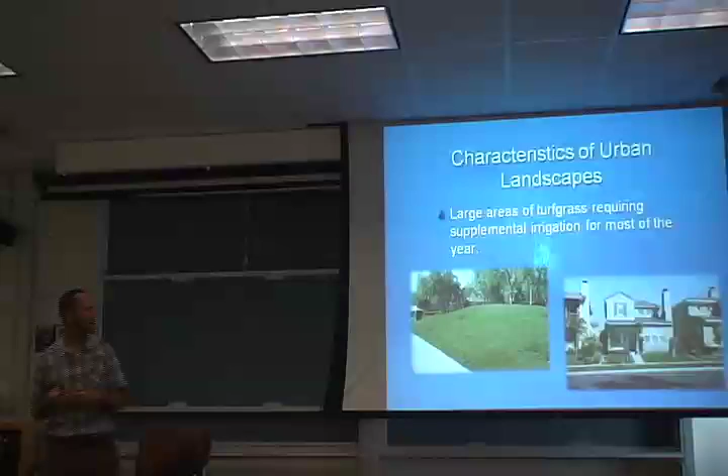Here's something you see quite often, maybe not as common up here as in Southern California. Speaking as someone who's not a landscape architect, there's a belief that when you go to a shopping center or urban area, they tend to cover things so you don't see the tops of the cars. Your eye kind of goes up, and they do that a lot with big sloping turf grass areas.

Here's an example out in front of a homeowners association. The entrance is here, and they're covering that wrought iron gate that's maybe not that attractive, which you don't really see until you get up closer. So from the road, you're just going by and you see green turf.

The problem is you have these large areas of turf grass, sloped pretty significantly. It's actually kind of entertaining watching people mow and maintain these things, pushing a lawnmower up or running after it as it goes down into the street. Then there's a sidewalk put in place, and then the street right here.

So when you apply fertilizers or irrigation water, anything applied on top, like pesticides or fertilizers, runs very quickly off this soil profile onto the sidewalk and out to the street, into the storm drains, and then we have negative impacts on our local creeks and streams. So turf grass is a big common thing.

Most people, especially when they move into a new home, have maybe 60 days, sometimes 6 months, to put in their landscape, and they need to do something quick. So most people call the sod farm and say, just deliver a big pallet of sod, and I'll put turf grass in front. Or a developer may do that for them. For the most part, it's going to look something like this.

It's not a big landscape in front of the house. This is very common, obviously there are exceptions, you can have larger estates, but for the most part this is what our landscape is becoming dotted with.

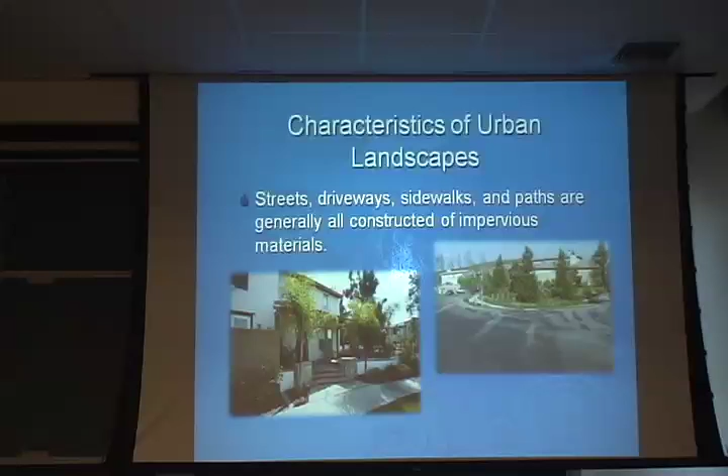So the developer put in what they were supposed to do. They put in a swale, but then they lost track and said, okay, we need to make it look good, so we're going to put in the most common turf grass, which is tall fescue, marathon. They put that in, and now they're maintaining it like it was a typical turf grass area. So it's losing its ability to do what it was originally planned to do, which was catch runoff and filter pollutants. Now it's kind of contributing to the problem. They're fertilizing it, mowing it, and having to irrigate it. It doesn't really solve the problem we're talking about.

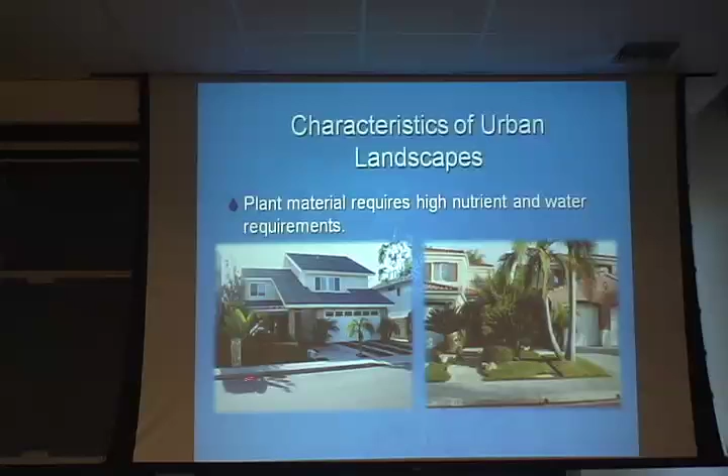Most of our plant materials are those that require a lot of nutrients to maintain their green color, as well as usually a lot of water, although we're finding there are some plants out there that we think use a lot of water, but maybe don't necessarily need as much as we're giving them. But for the most part, that's the belief most people have: regular water, regular fertilizer, especially for turf grass. So here's our typical landscapes in Southern California.

So anytime you do any applications of chemicals, especially fertilizer, people don't cover those drains, they don't even think about it. They just basically go right over the top of it. So you're basically putting pollutants directly into your storm drain system that way.

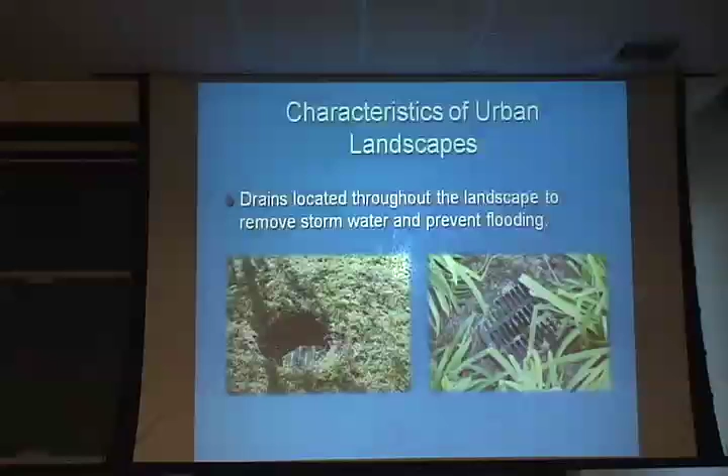And in older homes, people kind of lose track of these drains. You could be out gardening or doing some other activity in the yard, digging, and all of a sudden you'll hit something and think, I didn't even know there was a drainage pipe there, or some kind of other drainage system. So that's an issue.

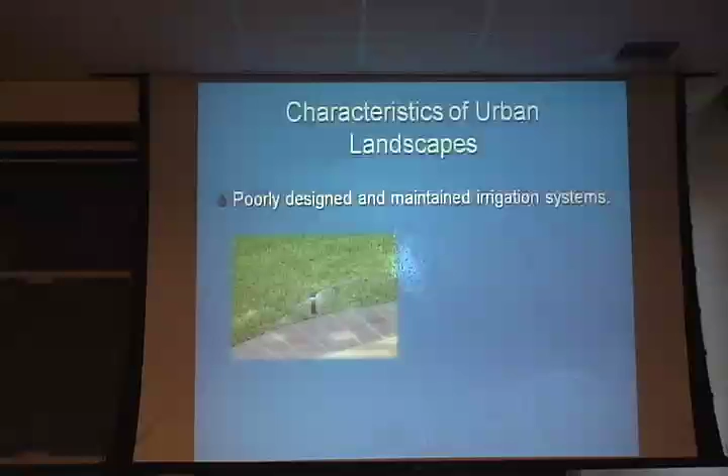This is probably the number one issue, and it's one of the reasons why we hand out those sprinkler keys you got earlier—that's just one way we get information out to the public to let them know one of the biggest issues we deal with is poor irrigation: poor design, poor maintenance, and poor scheduling. People just like to turn on the water, and as long as everything's green and looks good, they think things must be irrigated properly.

And that is true in that case, but we've got plenty of runoff issues during the rain, or sprinklers turned the wrong direction and not even watering the landscape—they're watering the hardscape instead.

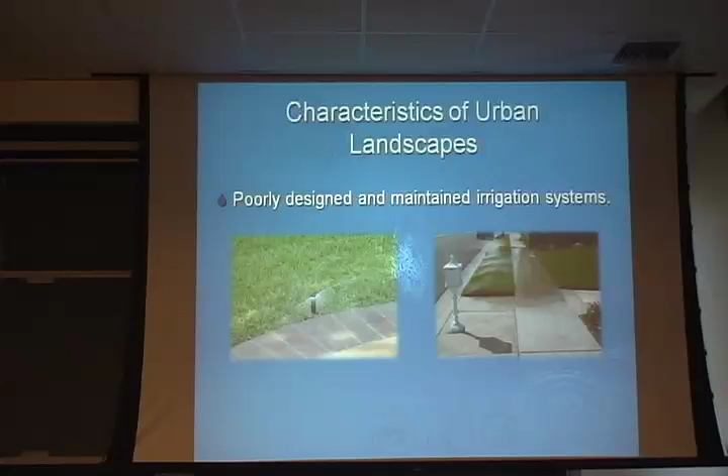Pressure too high in your system causes a misting effect, which leads to runoff very quickly, and you also don't get good distribution uniformity onto the plant material you're trying to irrigate. This is a common issue where people install a new irrigation system without checking the incoming pressure, and end up with sprinklers misting like you're at a restaurant in Palm Springs.

The other issue we often don't think about, generally an ag issue, is the movement of sediment. The thinking is that once you urbanize, pave over everything, and put in landscapes, you won't have much sediment movement. I'll show you how we found that not to be the case—this is an example of a landscape with a broken sprinkler that hasn't been fixed for some time, so it's picking up sediment and mulch and moving it across the hardscape system.

It's hard to tell, but this is sloped right out to the street into a gutter system, and so again, it's a way to carry pollutants.

One of the biggest pollutants we see on sediment are all the new pesticides that are out there. They adsorb to organic matter very well, and the idea is that they adsorb well so they stay on site. That's true as long as this doesn't happen. What we're finding is this happens more often than not, and we're ending up with pesticides in the streams and creeks again.

Often you'll see broken sprinklers - that's just poor maintenance. That's very common with homeowners as well as commercial, but even more so with homeowners. Most people, if they don't see any brown spots, and their irrigation comes on at 4 or 5 o'clock in the morning, they're not interested.

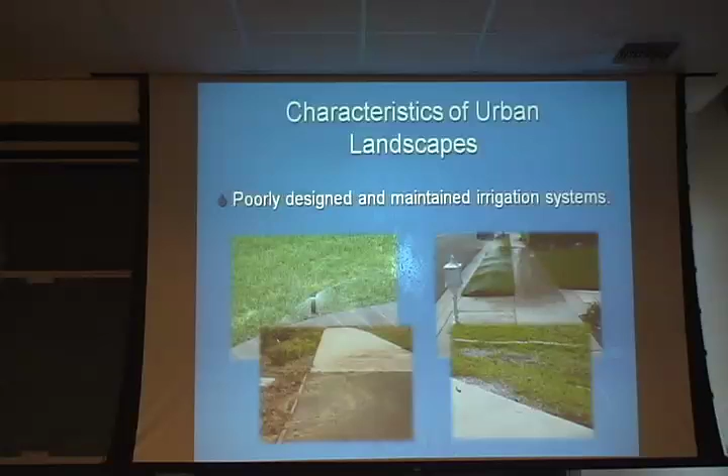Then there's these kind of designs, and these are becoming more popular again. They were popular a long time ago, then disappeared, and now we're seeing them pop up in some of the new developments. This is down in Corona del Mar, about 2 blocks from the beach. This is a little bit further up, but what's difficult about this? It looks good.

How do you irrigate that? Unless you've designed some sub-irrigation way that you can irrigate it without runoff, you're going to have several sprinklers throughout, and you're going to end up watering a lot of hardscape. And you're going to have a lot of runoff - it's just going to happen. Often that's not thought about. This turfgrass is a high water user - you put a real fine strip of turfgrass and surround it with hardscape that gets real hot, you're going to have to irrigate that a lot.

Question: What type of grass or ground cover would you suggest using instead? Because I know that's a really nice, popular design now. It is a popular design, and to be honest, my suggestion is it's just not a good way to go. Plant material in a situation like that is almost impossible to irrigate properly.

And then also you have other issues that I see. Usually it looks good for a while, but then once it's been driven on and you park cars near it, it's hard for homeowners. I get a lot of calls from homeowners - I've got this design and I've got brown spots or yellow spots, and it's like, well, you're parking your car there, you get all the fluids coming out. It just doesn't look good.

So if it's going to be an area where it doesn't get high traffic, you might be able to get away with it and use some kind of stuff. What about like a patio or something? You might be able to get away with it in that situation, especially if it was drought tolerant or some sort of succulent. Yeah, so you could use succulents, thymes, those kind of things - those would probably work better in that kind of situation.

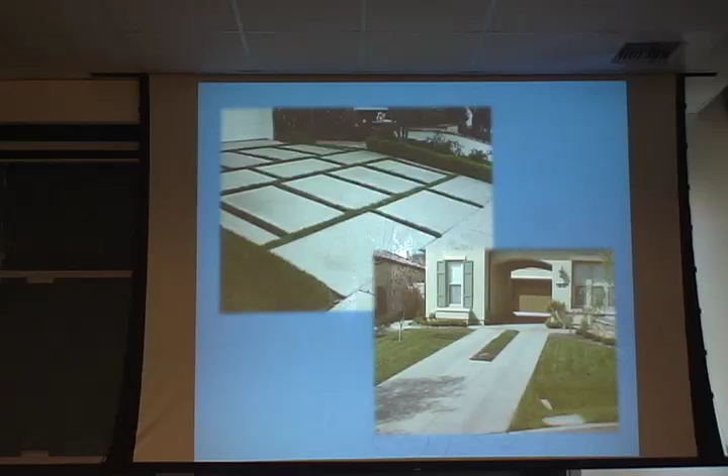You could have the design up there, and then you need to make sure you've done some other mitigation to take care of it. Here's a picture of that little bit of a swale. You can see the turfgrass going right down into the swale. It doesn't become a real effective swale though, because if you're fertilizing and watering it, it's basically just part of your lawn.

So here's an example of that curb core. This photo was taken out in the Corona Temecula area in Southern California. You can kind of see the green cast in the gutter here, which means you're growing algae. What does algae need to grow? It needs nitrogen, but it also needs water there all the time. That means there's water in these gutters all the time, it doesn't dry out. Whether that's from irrigation, car washing, or any of the other activities you do in and around your home, this is just a constant thing you see, and that's why we have that term urban drool. It's just a constant thing that's going on.

The project that Loren and I are working on - I think he talked a little bit about it at the first class - is looking a lot at just how much urban drool is going on. We see it all the time. We can go out any time of day to any of our sites, and there's always some water to catch.

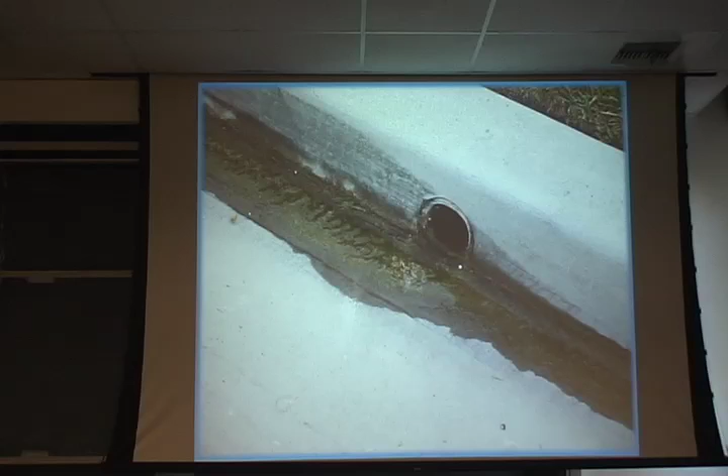Now, you'd think that wouldn't be, because everybody's always grown up with these signs - I know I have - no dumping, drains to ocean, or they talk about whatever rivers are close by to wherever you live. Don't dump, and this includes going right into the storm drain. This has been somewhat effective, but I think there's still, when you go out and talk to people, they understand that yes, it drains to the ocean, but they often think of dumping. Like it says dumping, so they think of the person dumping a can of oil or washing their paint can out in front of their house. They're not really thinking about the day-to-day activities around their home or what's going on in their landscape that also contributes to this, because that adds up over time.

And that's what we found in our research, that if this is going on 24 hours a day, 7 days a week, maybe it's a very tiny amount of nitrogen or pesticide. But if you add up all those days over the entire year period, you're going to end up with a large, large load of whatever it is - nitrogen or a certain type of pesticide. So people don't really have that connection yet. They still don't quite understand that every activity they do around their home could have an impact downstream.

So obviously these things go into these storm drains, and for the most part, in Northern and Southern California, once it gets out of your developed area, it goes into some kind of natural stream. There's very few cases, maybe in Los Angeles and some of the older developed areas, where they go into nice big concrete flood control channels. They've gotten rid of all the natural vegetation, so it's a little different system, and it goes right out to the ocean. But most of the newer developments, it's basically into a stream or a creek that's not used for flood control in that sense.

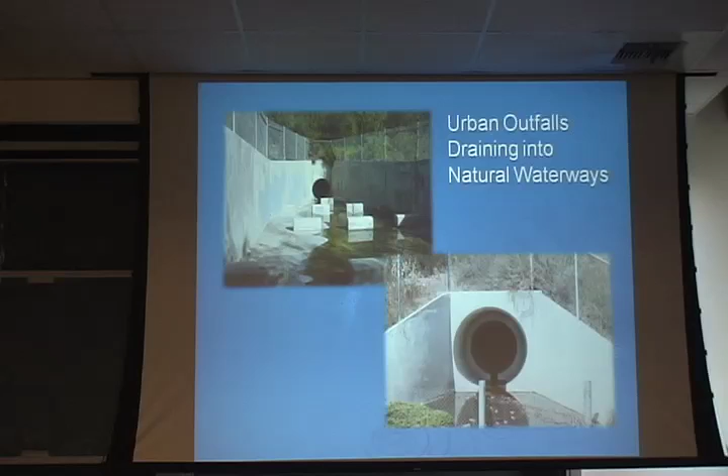So you get all those pollutants, trash and sediment, all those things. In dry weather, they end up on this apron, and then once you have a big storm, it pushes that out into the creek further on or into the ocean. In Southern California, we're always having beach closures because of that - right before or after a storm is when they have the beach closures. But a lot of that stuff's being loaded up into the system all the rest of the year, and then when we get that first big storm, it gets pushed in and closes the beach. So you end up with all kinds of detrimental effects.

So you've got algae blooms. This is a picture of the Newport Back Bay, and there's all kinds of floating algae mats. For the most part, one of the things we also have a hard time with is convincing people that yes, what you do around your home has a negative impact downstream - but should you care about that negative impact? Some people don't have a connection with the environment downstream. Maybe you can't always use, well, do you go to the beach and go swimming? Some people never go to the beach, especially in certain areas of Southern California further inland. It's just not something they do on a regular basis.

They're not surfers or whatever, so you've got to find what kind of beneficial use they think they have for water - that could be simply that it's used for drinking water, or some other recreational activity like fishing or all the things you've heard about. People usually have some connection in that sense.

Okay, so this is just kind of a summary of the things that our current urban landscapes result in as far as water quality. So we said increase in impervious surface - that's a 50 to 70% increase in surface runoff when you do that urbanization.

The rainfall is not detained. In those first couple slides I showed you, when you have a rainfall event, most of that water is going to end up percolating into the ground. That's not going to be true in an urban area, because that's not what we want it to do. We want it to move away very quickly from all of our structures and then funnel it off to a lake or a stream or creek or the ocean.

The other thing is that we disturb and compact and pave over all the soils. So even if you have a good soil system there, when the development is put in, it's basically removed. You're going into a sometimes very sterile environment that doesn't have the capacity to filter nutrients and break down pesticides. So you end up with poor infiltration and percolation, and then when you have a rain event or try to irrigate, you have runoff very quickly and easily.

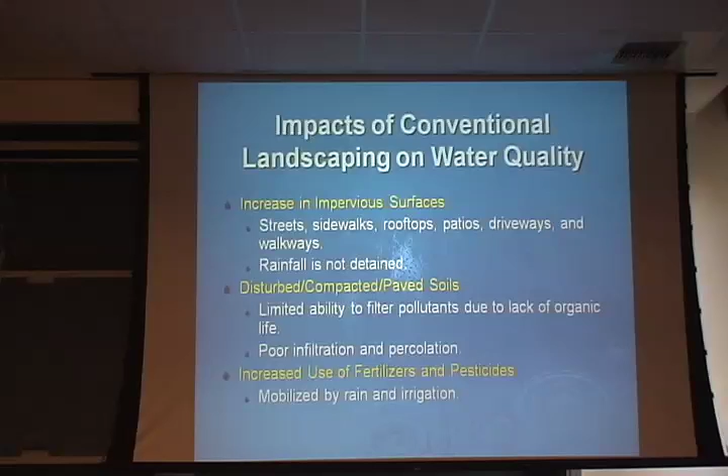Lastly, you see really an increased use of fertilizers and pesticides to maintain the aesthetic value of those landscapes. People want things to look a certain way. Obviously some homeowners have more tolerance than others, and it really depends on the situation, but for the most part we are using more fertilizers and more pesticides in that situation.

So what I want to do now is go through a demonstration, outreach, and also research project that we put together at the South Coast Research and Extension Center in Irvine to look at some of these things. About 5 to 6 years ago, we had a lot of pressure, a lot of people asking questions from a stormwater viewpoint - working for the counties, working for the cities, working for professional landscape contractors.

They're all coming to us saying, we don't really know what to do. What kind of things should we start implementing? What works? What doesn't work? What isn't extremely costly? Because there's a lot of nice things you can do if you've got a lot of money to spend.

And it's getting even worse now. I mean, people aren't willing to come in and just rip out a landscape and put in all these great features that mitigate pollution, okay?

So developers also came to us and said, what works, what doesn't? We've got all kinds of companies coming to us saying that they have the magic bullet, this will solve every problem that we have. What do we do? So we came up with this idea of putting together a few landscapes that took some of these ideas that weren't real expensive, and we tried to plug them into a residential landscape and see how well they work.

The designs were - we had one typical landscape, so we wanted a control, which was our conventional landscape. It was very simple, very similar to those pictures I showed you at the beginning where there's turfgrass in the front. Basically I call this my Home Depot Lowe's yard - all the plant material is stuff you could walk into one of those big box stores and find really easy. The irrigation system is similar, and all the features are basically conventional or traditional.

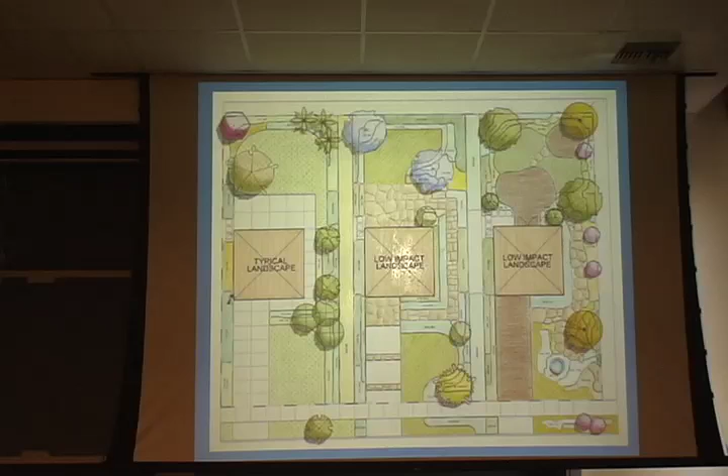I should say that the landscapes - again, I told you earlier, I'm not a landscape architect - what I ended up doing is interviewing several landscape architects that were working at the time when the economy was good and houses were being built like crazy in Orange County.

I went out and found 3 or 4 landscapers and interviewed them. I said, if I was a client and gave you this list of things, what would you design? I needed it to be something pretty basic that the typical person would want to maintain, not anything elaborate that a gardener would want to do.

It's the homeowner that goes to work, comes home, opens their garage, and doesn't really look at the landscape. It just has to look good for them on the weekends. So the first landscape is the traditional one.

Again, a high percentage of impervious surfaces, so it has the driveway and concrete walkways next to the structure. We had solid pipe drainage, with drains throughout the landscape, all connected to 4-inch solid drain pipe that comes to the front of the landscape into a curb core out to the street.

We had large cool season turf areas in the front and back, marathon sod. Then we had poor irrigation design, scheduling, maintenance, and installation, since I did the installation myself and I'm not an irrigation installer. I wanted heads that were mismatched, like if I went to the hardware store because a sprinkler broke, I'd just find one that fits, a tinker-toy kind of thing put together. That's what that landscape irrigation would look like.

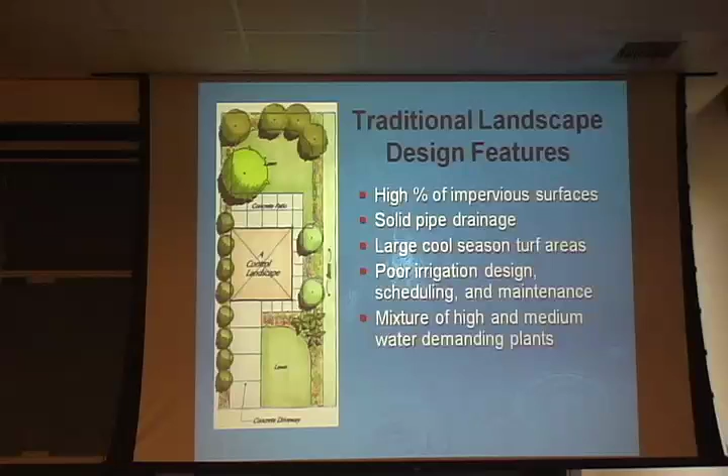Then we put a mixture of high and medium water demanding plants. Many of them are believed to be high water use, but there are actually several in there that we found don't really need as much water as we thought they did. So that's the traditional landscape.

We ended up with a footprint that doesn't have a full-size house—the grant I wrote this for wouldn't fund me building 3 full-size homes. But I had a structure there because I also wanted to look at what falls on the roof: deposition of nitrogen, and deposition of any volatile pesticides that can land on the roof and run off. I wanted to find out what happened during a rain event, what was in that water, and whether that's a source of contaminant out to the street.

So this has European white birch out front, 2 or 3 of those. It's got buxus, star jasmine, hibiscus, magnolia, and a whole lot of turf. That's basically the design there.

There's a quick picture of the backyard. We did all kinds of things wrong, like putting in trees that were excessively root bound in the middle of the lawn, and then irrigating on default every day. The clock was set worst case scenario, which is what most people do—set the clock once and never change it again, letting it come on every day no matter what. Impatiens, photinia, agapanthus, all your typicals that you would find.

Patio out back, concrete patio, and you'll see later how that became kind of important. Landscape drains dotted throughout, and we had some queen palms there as well.

I think you would agree as architects that this is probably the plant palette you see most commonly, especially if a developer were to come in and say we want to do all these homes, here's the list of plants you'd probably be able to choose from, as well as from availability.

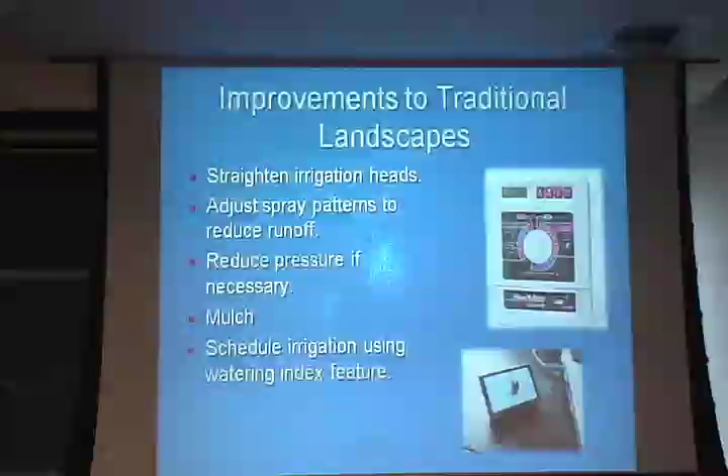So then we did that for about 2 years. We ran that system and had pulse meters on the water meter, so we were able to determine how much water we were putting on that landscape. We were also able to collect all the runoff from each landscape and measure how much surface runoff was coming off those. I'll show you the data today.

So we did that for 2 years, worst case scenario, and once we were done with this particular grant, we decided that most people have that landscape and don't have the money right now to make all the changes we want them to make. But are there things they could do in their existing landscape that could improve things?

So we came up with a list of things, and we've been training a lot of homeowners associations on these various things.

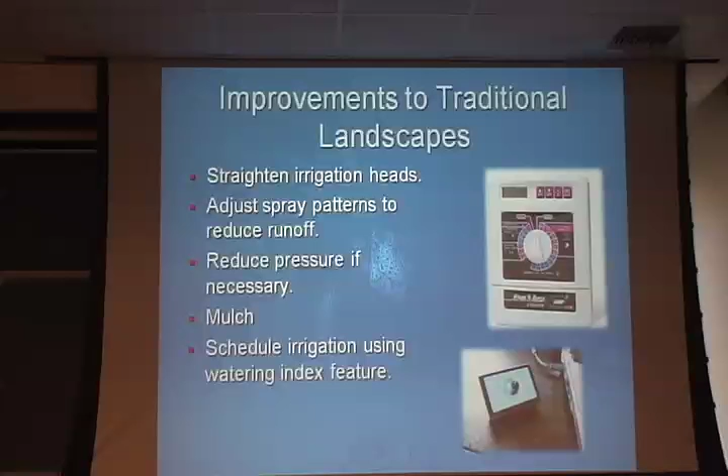Just getting in there and doing some maintenance on the irrigation heads makes a big impact. Adjust the spray patterns, as we were showing earlier, where they were tweaked and maybe not spraying in the right location, and reduce the pressure so you don't have misting. Mulch is a big one too - mulch the entire landscape.

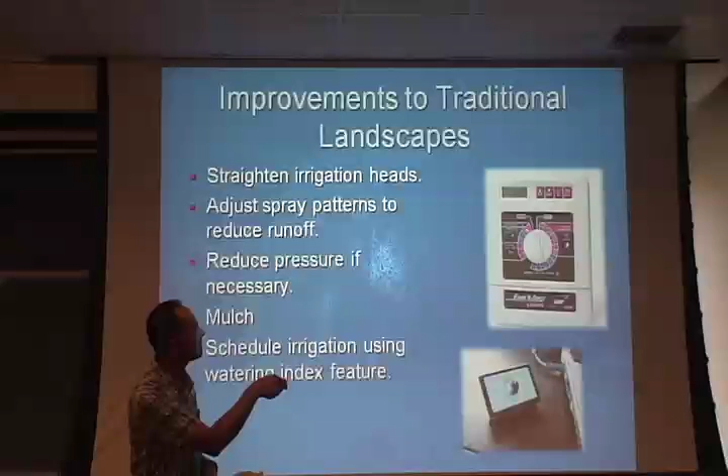Then for scheduling irrigation, we started using a watering index. Most of the new clocks have this little setting called water budget percent. The way you do this is you set the clock and determine how long your longest run time is going to be, which is July or August, the hottest time of the year. Let's say at that time you need to irrigate your lawn for 15 minutes to get enough water on it.

You set that time in the clock, and you never go back to change it - you don't do that anymore. Instead you go to that dial, the watering budget, and say okay, this time of year it should be using about 50% less. There are websites you can go to and get information on what the watering index is for that particular day or week, however often you want to change it. You just change it to 50%, and it reduces all the run times by 50%. That's a quick way of doing it, because people don't like changing things on their clock - they get confused when you start changing minutes and days to irrigate. So this was just a method to do it.

We also have a wireless unit you can purchase and put inside your house, so you don't have to go out to the garage. It just sticks on the refrigerator or wherever, and you can adjust it there. Those are available too, and it works pretty good.

But there are days when it's extremely hot and the watering index is using historical information - you could have a problem if you don't make those adjustments. You might not irrigate it enough.

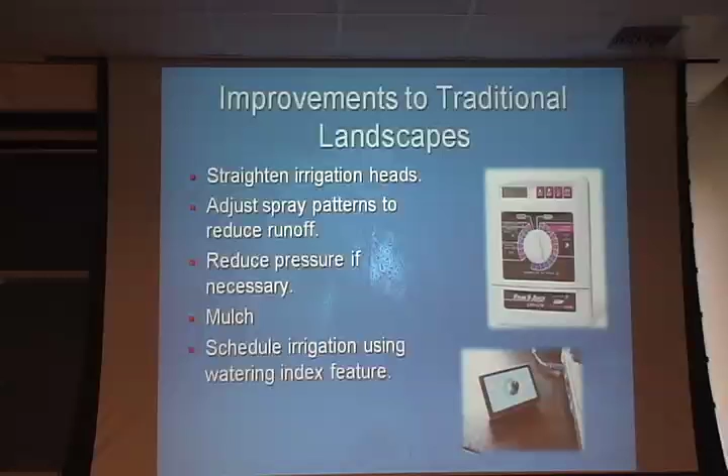Okay, the second landscape - the main goal here was to make everything as pervious as we possibly could. The soil we were working on was a very sandy loam soil, so we had good infiltration and percolation, so we didn't have to worry about those things. These would not be good BMPs for a lot of places, if you have shallow groundwater or soil that doesn't infiltrate well - you'd have to come up with alternative practices.

So we used a pervious patio and walkway. It was flagstone, but instead of sinking it in concrete like most people do, we put it in decomposed granite that had a small amount of binder in it to bind the granite together even more than it normally does. You can use all kinds of binders - some, if you use a really high concentration, end up not being pervious at all, just like concrete.

We used a Mediterranean plant palette. Again, I didn't tell the architect what plants to use - I just said pick those that we know are good ones for a Mediterranean plant palette.

Instead of having solid drainage pipe for all the landscape drains, you can use perforated pipe, which is pretty common now. You put a sock over the top of it so sediment won't go into the pipe - almost like a French drain type system. Then we switched from cool season turfgrass to warm season turfgrass.

The irrigation system was designed by a professional, and I can't stress this enough - this is an art we really need to focus on, properly hydrozoning the landscapes, as well as working hand in hand with that designer before your design is done. Because I see a lot where the design is done and then handed off to the irrigation person.

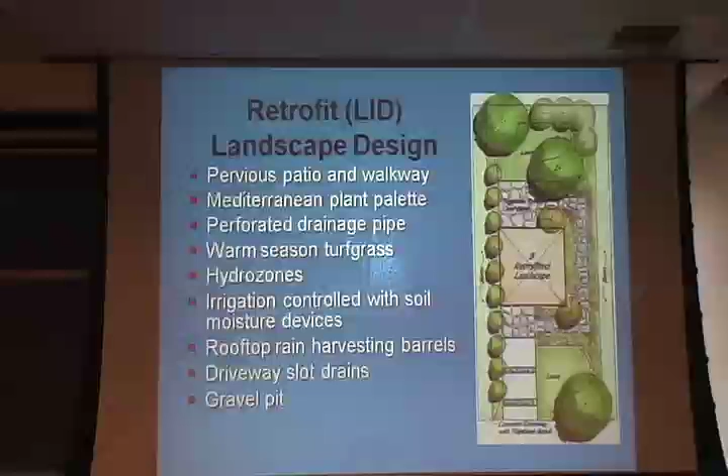But it's not for me just water conservation purposes. It's also for water quality, because on those low storm events, you can collect a lot of that water and keep it on site, and use it again, rather than letting it run off and carrying all the pollutants. We installed a driveway slot drain, and then also a gravel pit.

So I'll go real quick through that design. This is that same one right next to it, but we have the new design. All this equipment here is monitoring equipment, in case you're wondering why the lawn has all this stuff sticking out of it. These are just soil moisture sensors and other devices that we're measuring.

So what we put in was a slot drain. You basically put these pipes in, these 4-inch drain pipes. They put the driveway in over the top of it, with a little pattern of flagstone. Once that's all done, you come through with a concrete saw and cut through that joint, basically cutting a little slot right in that drain.

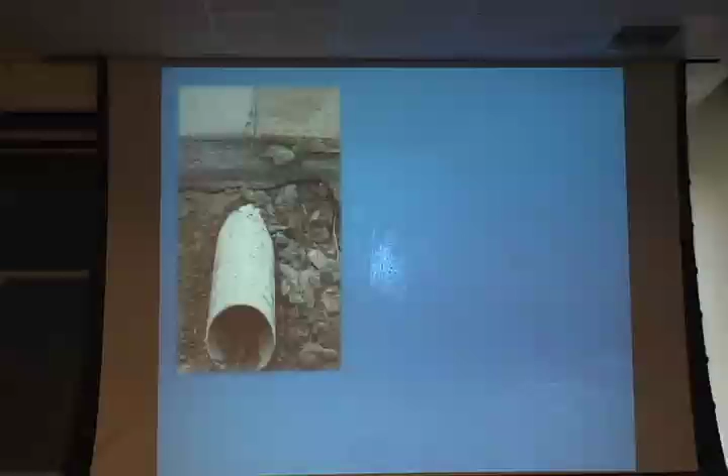So then what happens is the water falls off the roof onto the driveway, starts running down the driveway, but falls into that slot, and is pitched to vegetation on either side, whether turfgrass or a planter. Studies have shown that most runoff from a storm event comes from the roof onto the driveway and then out to the street. So if you can mitigate that, you can keep a lot of things from moving off site.

So there's the slot after it's been cut. It's not real noticeable, which is also nice, you really kind of have to walk up onto it to see it.

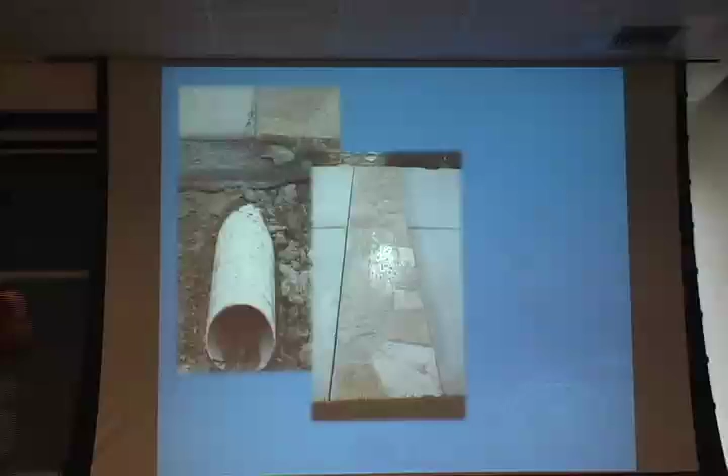The water goes down the driveway, facing the street this way. The water's coming down here and it falls into there instead of continuing out to this apron on the driveway. We've got several of those installed, not just one.

This is us installing the drainage pipe, and this is our gravel pit. It's not very aesthetically pleasing, but we wanted to mark it so we could show people. You could design this so it looks a lot nicer, but basically all that landscape drainage, as well as the slot drains that I showed you, all drain to a gravel pit.

So there's about 7 feet worth of gravel, so it's like a dry well. I think Julie last week talked about a dry well, and showed a couple pictures of it. This is similar, but you basically fill that hole with a lot of gravel and line the outside edge of it with weed cloth or geotextile to keep sediment from coming in. It's basically a holding basin for low storm events or irrigation runoff from the property, allowing it to seep back into the soil.

If you have a big storm event, there's an overflow on the side here that takes it on out to the street, so you don't have flooding issues.

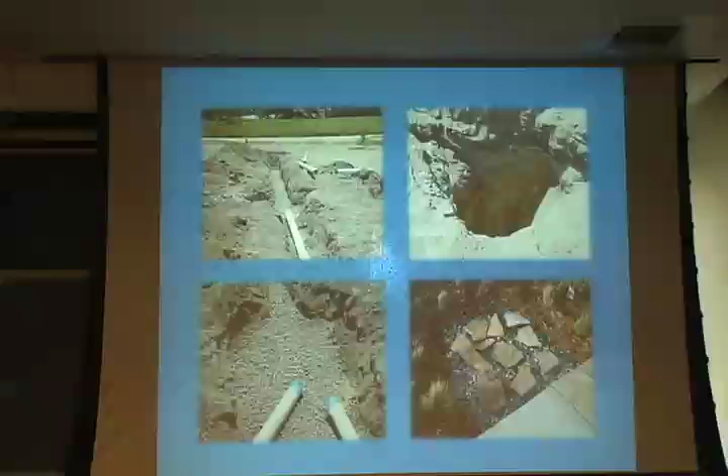Okay, here's the system that irrigates. We have 8 different soil moisture zones that connect right to your existing controller. This is the add-on feature here, so there's 8 zones, and you just have a dial that says wet, dry. If you think your turf is too dry, you dial it a number down to make it wetter, and it'll allow it to come on more often—instead of every 3rd day, it'll now come on every other day. That's the only kind of change you need to make, and after you've established the landscape, you don't really need to change it anymore. It basically adjusts for that.

The biggest thing is you've got to make sure you put that sensor in the root zone of whatever plant you're going to use as your indicator. If you put it too low or too high, you're going to be under or over watering. There are other sensors available that we test as well to see how they do.

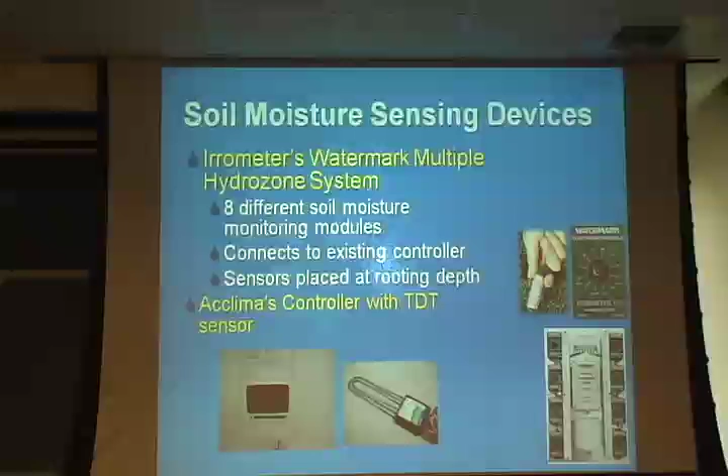The turf grass in the front is Seashore Paspalum, a warm season turf grass that withstands a lot of salt. It's used on golf courses a lot, but homeowners tend to like it now as well. You can mow it really short like Bermuda grass, or let it get 2.5 inches tall and it gets kind of spongy and a little patchy, but people tend to like it.

So there's the sensors out in the middle—there's what the sensor looks like. They're buried in the soil. In the parking strip we put UC Verde buffalo grass, which is one bred by the University of California. There it is in the back. It only has stolons, so it's not quite as aggressive—it doesn't have any rhizomes that go in.

We took all the sprinklers and put on low precipitation heads, MP rotators. Instead of 1.5 to 2 inches of water in an hour's time, these actually put out 0.37 to 0.5 inches in an hour. So you run the sprinklers longer because you've got to get the water out, but the best thing is it allows infiltration to occur—you're not putting it all out in one period, it does it very slowly. And you can easily adjust them into various different patterns.

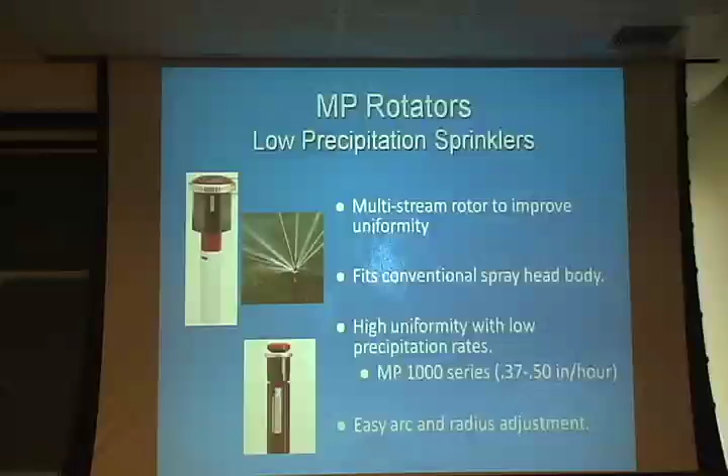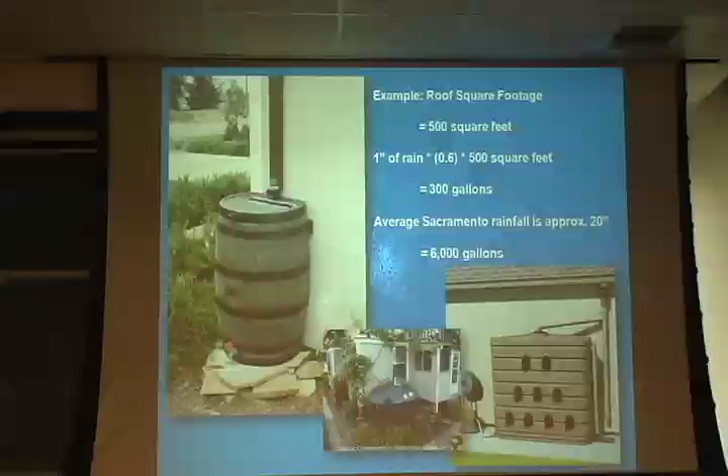Okay, so that's those. Rain barrels, all different types available. This is just a quick calculation: 1 inch of rain on a 500 square foot roof surface will yield 300 gallons of water. Average Sacramento rainfall is approximately 20 inches, which would give you about 6,000 gallons of water that's free-falling from the sky. You might be able to use it all at once, or you might have to use it over time, but eventually what we did is basically irrigate any potted plants, or if there's a vegetable garden or something in a container, that's what we use it for.

The last landscape is very similar to the middle landscape, except now we've gone to almost all natives—about 95% native plants. There's no turfgrass anymore; it's been replaced with sedge grass. We thought we'd save quite a bit of water using the sedge grass, but sedge grass lives in a marsh, so if you don't irrigate it in the hot summer, it starts to go dormant and look bad. You almost have to irrigate it just like it was tall fescue—it looks its best doing that.

Same thing as the gravel pit. We had rain barrels we didn't put in; we actually put in these stormwater infiltration devices buried in the ground. Runoff comes off the roof, takes it out to this tub that's in the ground, and there's holes punched in the side, similar to the gravel pit, allowing the water to infiltrate back out.

So all those things I'm talking about, where we're talking about infiltration, are good when you don't have heavy soils or really shallow groundwater. If you have those two things, and on top of that you're using a lot of fertilizer and a lot of pesticides, you're going to have contamination issues you're dealing with. So you have to look at both of those.

We used all drip and low volume spray, a smart timer with an ET clock that's looking at the weather—we had a little weather station in the backyard taking care of that. And then we did extensive hydrozoning; this had actually 24 hydrozones.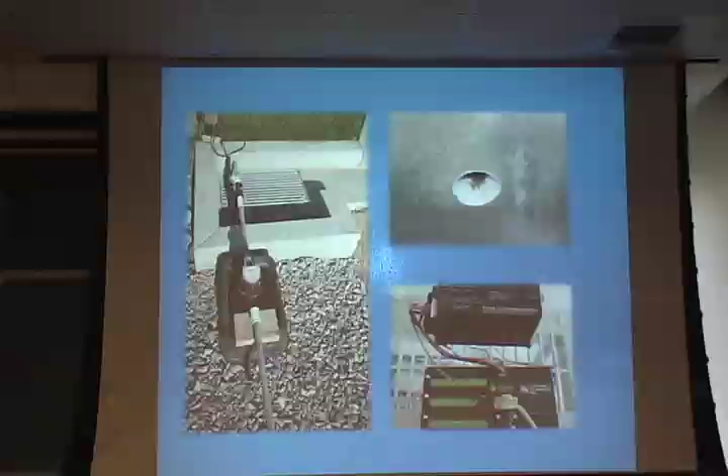Okay, here's just some data for you from the landscapes. There's the system, there's the curb core. The water goes into here, pumped out. We have a data logger inside each house. It tells me how much water is being used.

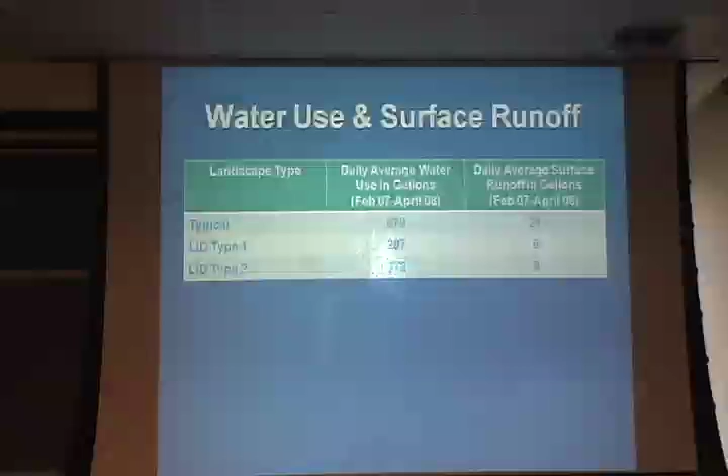So here's from February '07 to April '08. So the typical landscape, remember we had really bad irrigation every day, no matter what. This also includes any rain events that occurred. On running total, we had 879 gallons of water used that day on that landscape. The daily average runoff from that landscape was 21 gallons.

So if you can kind of imagine how much water that is running off a single home. Now remember, if you multiply this out, the size of the development, it's a lot of water. The type 1 and type 2, 287 for the middle one, 372 for the native landscape.

This one always gets people all excited because the native one is using more water. But when I installed this native landscape in January of '07, I installed it when you should install native landscapes, in the winter. We only got 2.5 inches of rain in Orange County that year. So I had to add a lot of supplemental irrigation. So that's why this has gone down quite a bit over time.

But you can see our mitigation strategies, just the design, our runoff now is down to 6 to 8. Most of that runoff that you see right there is from rain events falling on the sidewalk and the apron of the driveway, because we don't have any really way to catch anything in that.

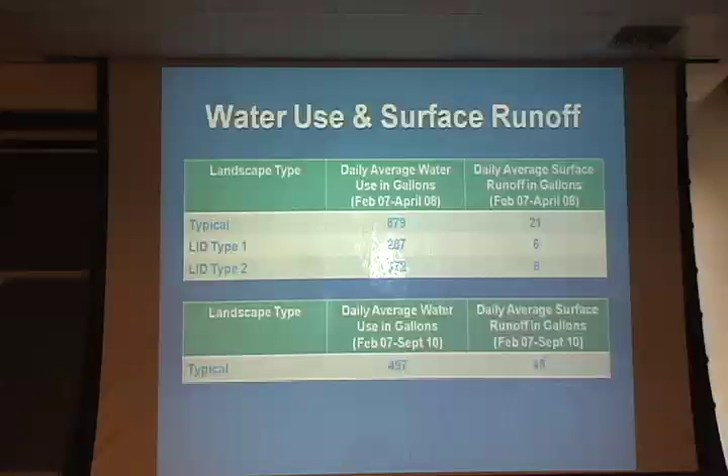We didn't design anything for that. Here's the data through September 2010. You can see how we've even decreased it more, because this includes establishment. And this is after we've made those adjustments that I mentioned earlier, just fixing sprinklers, using the watering index now. It really reduces things down.

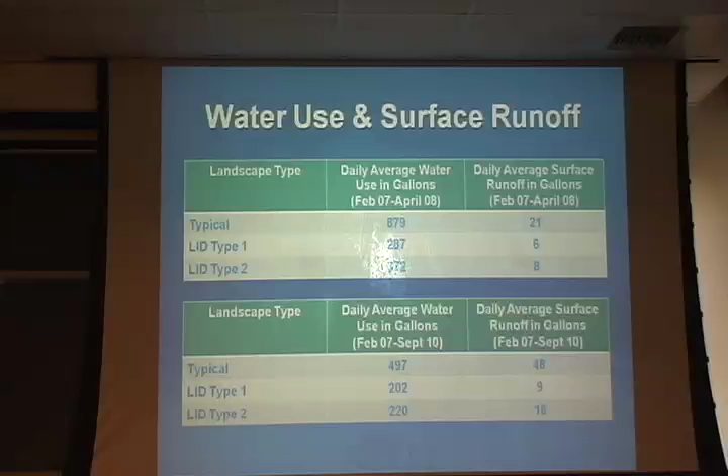Now, we had more rainfall though in the year, so we did drive things up a little bit. I think a lot of this difference here is the driveway, because we're using interlocking pavers here, which do allow some infiltration to occur, but not as much as our slot drains do in this landscape.

One last thing we did is find out what happens when we do pesticide applications to these 3 landscapes, and then the homeowner themselves does the application, or a professional does it, and then they decide they need to hose down their driveway or walkways. People do this all the time. I see people in my neighborhood all the time right before some kind of event, or they spill something in the driveway, they'll wash down the whole driveway to keep everything nice and clean. We think that's one of the ways a lot of pollutants, especially pesticides, are moving.

So we did this pre-treatment wash of all our driveways. We did an analysis of what was in that water to make sure we didn't have any pesticide already in it. Then we had a professional come through and do a perimeter treatment for ant control. They used a chemical called fipronil. They went around the structure, just the structure, and did a perimeter spray, which is what they'd do at a typical homeowner's house.

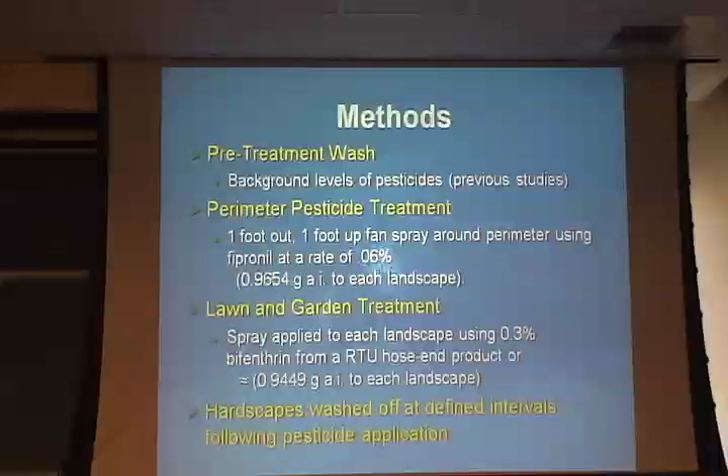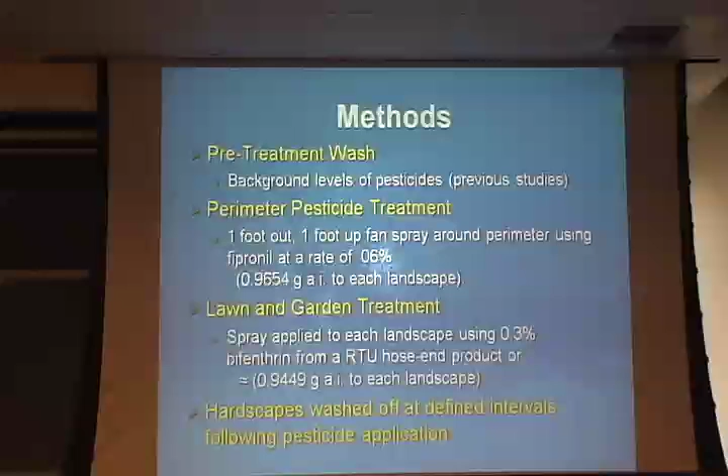Then, like a bad homeowner, I bought a big jug of bifenthrin, which is a general broad spectrum product for any kind of insect in your lawn. It basically kills everything. I used a hose-end sprayer that I could buy - you hook it to the end of the hose, and as soon as you turn on the water it starts dripping out all over you. We did a treatment on the lawns in all 3 landscapes, the front of all 3.

After that, we came through and hosed the driveways off at predetermined times - 24 hours later, 7 days later, etc. So I just want to show you that data real quick.

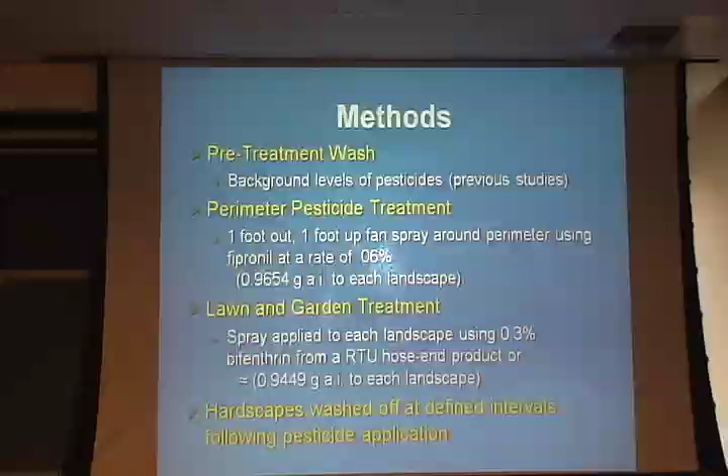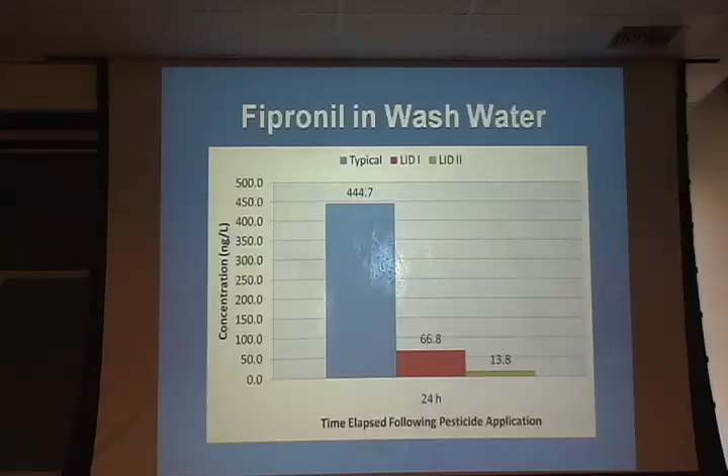This is just cleaning the landscapes, hosing it down - this is what you get. This is the typical landscape 24 hours later. This is parts per trillion, a very tiny amount when you're measuring, but that level, 444 parts per trillion, is extremely toxic. If that water were to get into a creek or stream and was monitored for toxicity issues, it would cause the death of quite a few organisms.

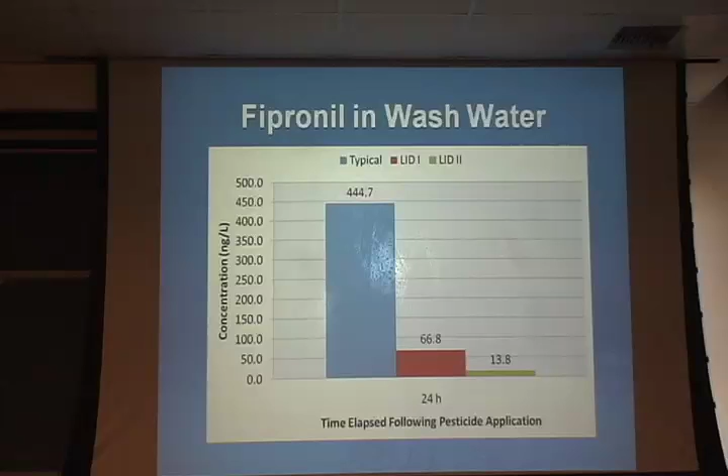The other 2 landscapes you can see. Second, I think this issue has to do with when I'm hosing down the driveway, I'm actually missing a lot of the slot drain because of the high pressure. I'm throwing and splattering things over the slot drain, so it's not this nice even flow falling into the drain. So I think that's why it was a little bit higher there.

Over time, eventually you don't have any material. But what also happens is if you're doing this kind of activity and washing things off regularly, your pesticide's not going to work anymore. You're basically washing it off, especially perimeter sprays. So what people have to do is call the professional back - they come every month or every other month because it doesn't last. You apply the pesticide and then you're basically just washing it off.

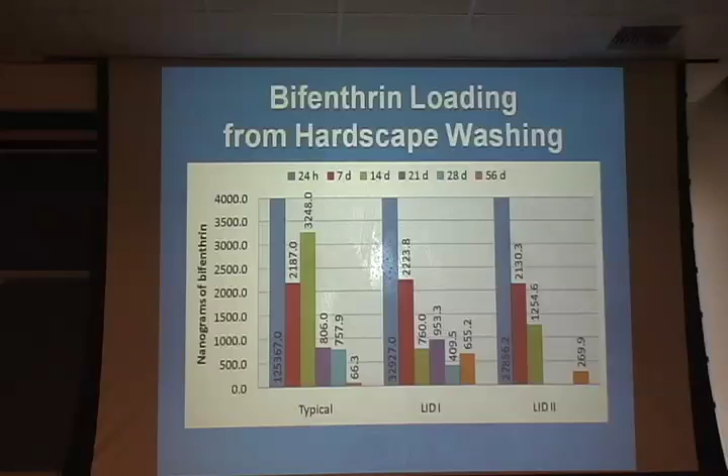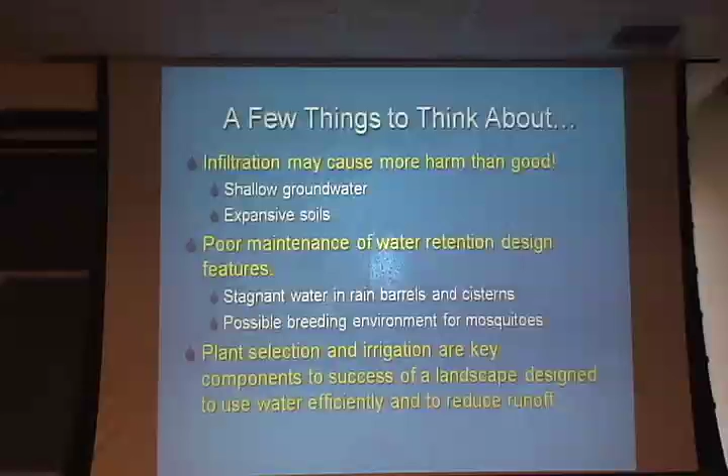A lot of the things we originally tried came out of these two books, and you have a copy of River Friendly. When you flip through there, you'll see some of their ideas—5 or 6 years ago is where I got those ideas, because that's what was being pushed. But when you talk to a lot of these people, it hadn't really been tried to see if they work. We're still kind of doing our own studies. There are questions about how long that gravel pit will last before it gets full of sediment and no longer works. Is it 5 years? Is it 10 years? Sooner or later you're going to have to go in there and remove the gravel and put new gravel in. So those are the kind of things we're still looking at, and we want to be able to tell people: if you design this into a landscape, the maintenance and longevity will be X amount of time.

There are also some really good books by Brad Lancaster if you're interested in designing things for rainwater harvesting. He doesn't just talk about containers, he talks about the overall design of how you shape the landscape itself. There are some really neat ideas in there. All right, any questions?

Anything else you want to get? Any questions for Darren? I have a question. Yeah, with the buffalo grass, aesthetically, how did that compare to the fescue?

So far, I've had it in for a year, so I've gone through one winter. The issue is always dormancy—people like it when it's green, but the question is will they like it in the coming months. The first year you put it in, I've been told it doesn't normally go dormant because it's so actively growing. So I'm curious to see what happens this year. In the back, I haven't mowed it, I let it get 5 to 6 inches tall. My plan this year, if we have some pretty cold weather, is to overseed with wildflowers and show it as a meadow. Once it warms up and the wildflowers die out, the buffalo grass will come back in. It depends on where you're located—closer to the coast, less chance it's going to go dormant; further inland, you'll have more of that issue.